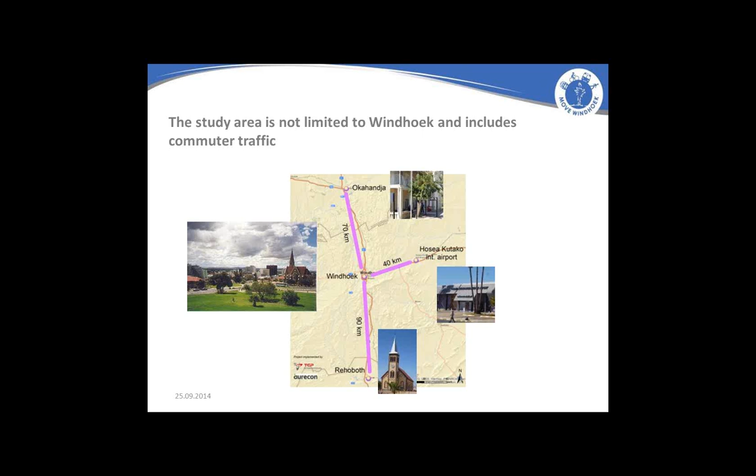Now, I don't want to bore you with too many technical and methodology details, but as this was an important foundation of the whole plan, I would like to give a brief overview of the methodology, especially the scenario assessment. The main features of this evaluation method were scenario development with certain measures to be assessed, economic assessments of investments, a multi-criteria assessment of impacts, and a system dynamics model for the macroeconomic assessment.

Two types of scenarios have to be distinguished: land use scenarios and transport scenarios. One of the first and most important decisions in this project was which land use scenario Windhoek would follow. Only based on this decision were the transport scenarios - business as usual and sustainable urban transport - developed.

The business as usual scenario continues the current policies, with urban sprawl and higher car dependency, while the sustainable urban transport scenario brings improvements in public transport, non-motorized transport, and a change of modal share in favor of those two.

Why it was so important to determine the land use scenario is because we figured that future transport demand and traffic patterns are heavily influenced by future land use patterns - that is, new settlements, densification of existing settlements, and other land use measures influence travel behavior of households and firms.

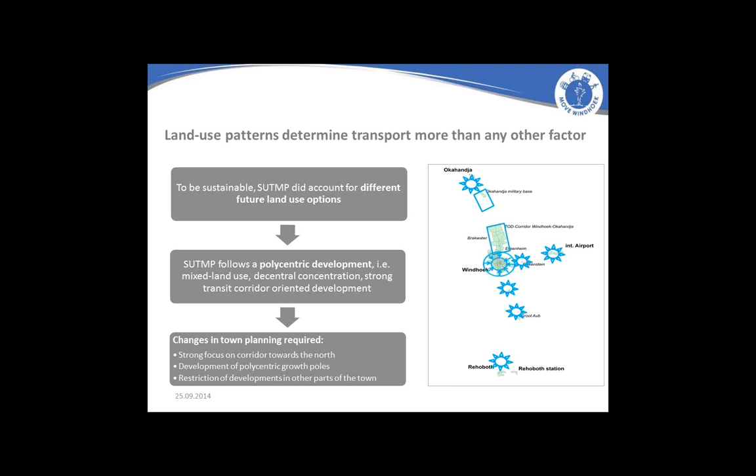Other key features of the new system are operation during the whole day and also on weekends, short frequencies during peak hours, which is one of the biggest challenges at the moment. Public transport has priority at intersections. The existing railway structures could also be an option for commuter rail. Easy access for mobility restricted persons is also new. And quite importantly, the dominating taxi industry at the moment has to be integrated into the whole system.

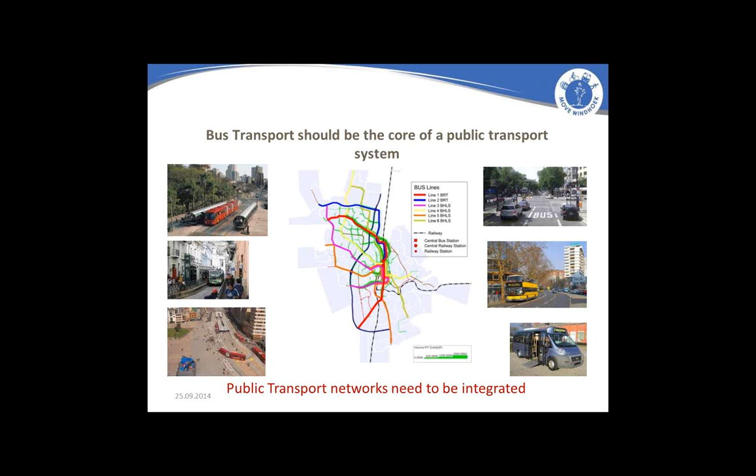Non-motorized transport, as I said, is an important feature, but we'll come to that later, so I'll skip this now. It's also quite important that network improvements be prioritized in accordance with demand, poverty, and access considerations along the main corridors. But the whole system should have an integrated and holistic character.

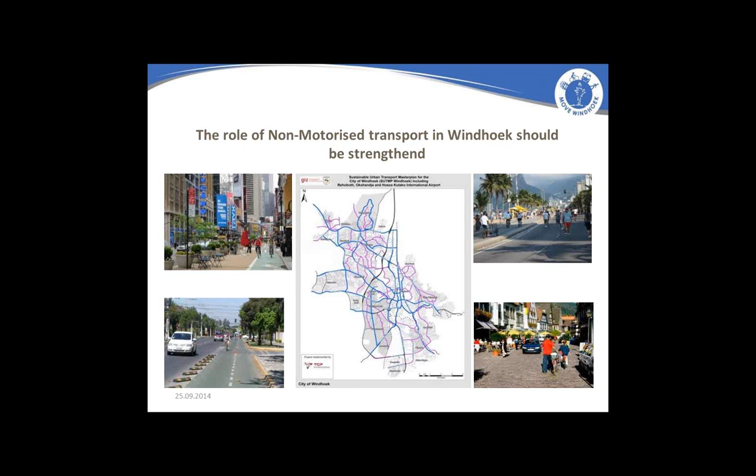What you should be able to see on the map now is that the proposed measures will be implemented in phases over the next 20 years. Since most demand is generated in the northern neighborhoods, which are mainly low-income neighborhoods, the first two lines are proposed here.

I'm trying to show you something now—you should be able to see the mouse. To the north, you have the railway, which is the planned backbone of the system, but only towards the end of the planning horizon, which is really 2027 to 2032. But I can also say there are political efforts being made for this to be employed a lot earlier.

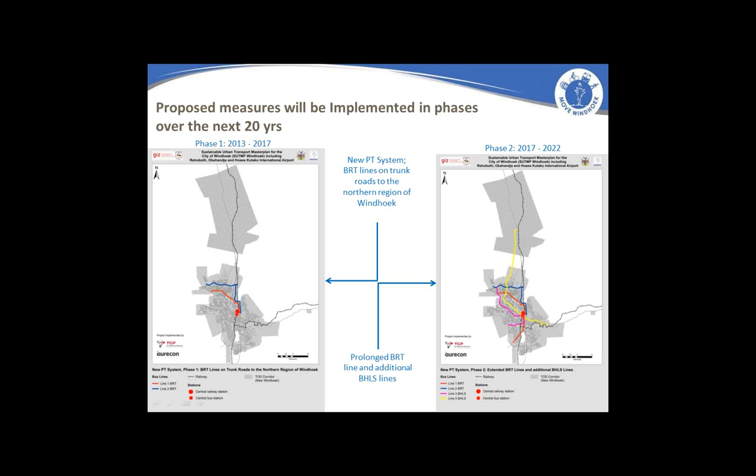On the right-hand side, you can see that over time additional high service bus corridors are added, continuing in phase 3 and phase 4. Phase 4, maybe another interesting aspect, is that you have a big settlement in the north, the Brakwater area, which at the time the plan was set up was supposed to grow to 250,000 inhabitants by 2032, but is now only anticipated to reach 100,000 inhabitants, as they're having problems with water supply there.

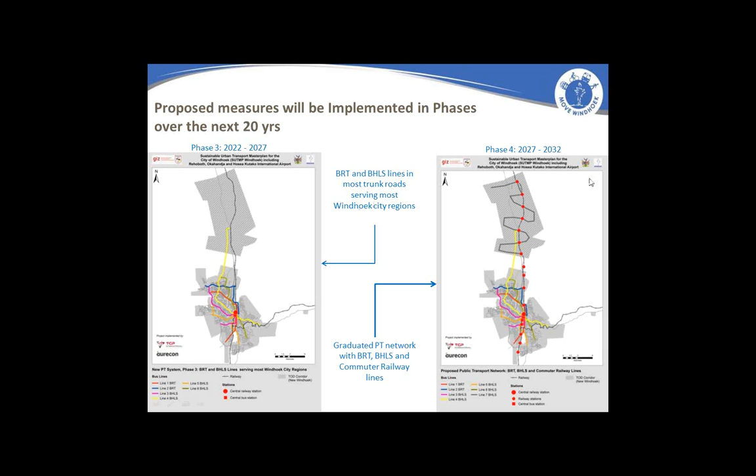Traffic demand management is also part of this, but not that highlighted. Institutional setup is also very important, but I'm going to skip this now and come to non-motorized transport as time is running. Non-motorized transport—Michael, please take over.

I will start with three slides of pictures of the current situation for cyclists and pedestrians. What you can see in those pictures is that most non-motorized transport happens on the road. This is, on the one hand, due to a lack of proper infrastructure and discontinuity in the network—or if there is a network or facilities, they are often weak or not well maintained, so people are basically forced to walk on the road. But on the other hand, this is also due to a lack of awareness among non-motorized transport users themselves.

So they're not aware of the risk they are running. In particular, one hotspot here in Windhoek is the crossing of the Western Bypass, which is like a freeway going around Windhoek. So people are crossing that freeway where cars are running at high speed. But also the motorized road users are not aware of the road safety risk occurring with pedestrians or cyclists on the road.

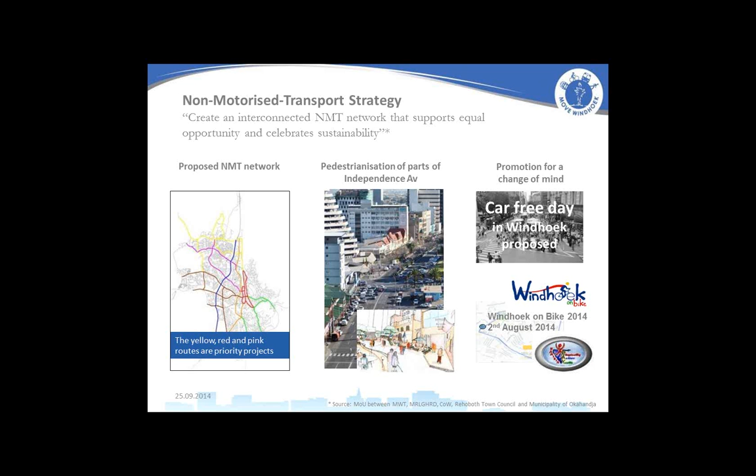One measure, for example, is the improvement of cycling and pedestrian infrastructure in the northern suburbs, between the two bus corridors we are currently studying. I'll show you with the mouse cursor: the red line, the yellow line in between, connecting the low-income residential area in the north with the northern industrial area. Many people use that corridor for walking to work.

So we are planning together with the City of Windhoek to improve that section, also addressing the road safety hotspot along the Western Bypass, where many people cross the Western Bypass next to a bridge, but on level with the highway.

Another strategy of the City of Windhoek is using planned or current road constructions or rehabilitations, and always including non-motorized transport infrastructure, which will lead to a gradual development of a network, together with constructions.

And an initiative from the Ministry of Works and Transport is doing a road safety assessment with a focus on the safety of non-motorized transport users. This will be done along the urban main roads, aiming at identifying measures, improving infrastructure, doing some signage along the road, or awareness campaigns to improve the safety of non-motorized transport users.

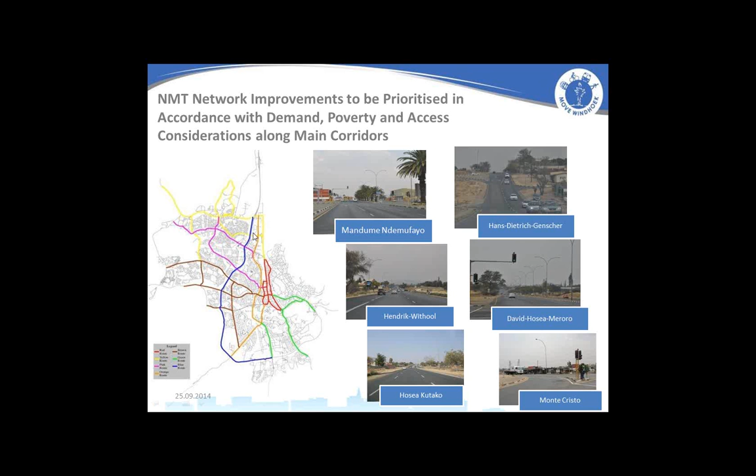One additional point I'd like to highlight is the importance of capacity development. The master plan clearly states that within the existing capacities, a major shift towards more sustainable transport provision is not possible. There are capacity deficits in major areas such as public transport planning, operations, non-motorized transport planning and implementation, regulation, and also general management and organization.

In this regard, we are working on a broad set of measures such as on-the-job training, internships, other trainings and seminars, study tours. For example, we are soon to hire an integrated expert for the City of Windhoek, who will support the city with bus operations, routing and scheduling of existing and new bus routes, and support to operations management. Obviously quite important in that regard is on-the-job training for the whole department of transport in the city.